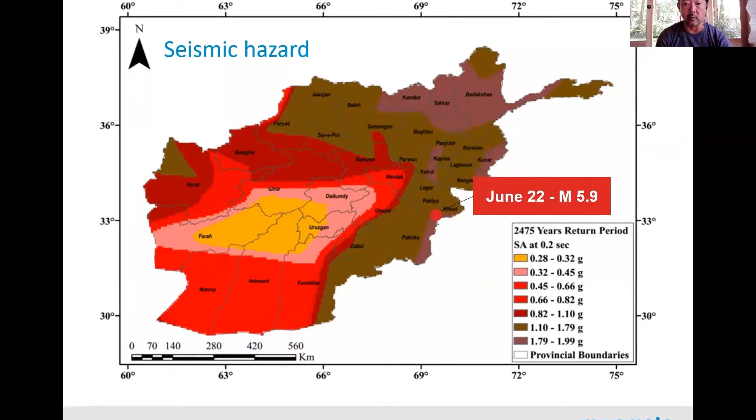So that causes essentially general panic. And many people think that there will be volcanic eruptions in the area. Obviously, that's not the case, but there's some general panic, which we see everywhere in the whole world, by the way. If you haven't seen an earthquake, that's what you see. So that's what's going on.

So earthquake damage caused about 100,000 people to be homeless. And I know this is maybe a little bit outdated information. So Mark or David, if new information comes out, you can always chime in. Okay. And it affected about three different districts out there. And on the right side of the map is Pakistan, essentially.

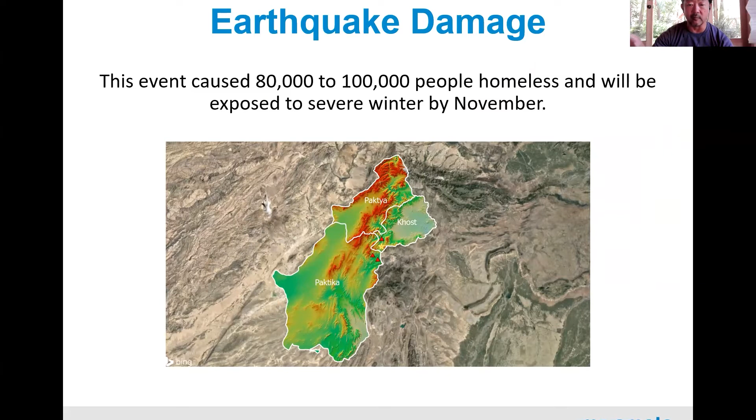So structural assessment: our ground team, led by Zadran, assessed 457 compounds, as we call them, which I'll show you a little bit later. It's a unit. It's a pretty sizable area, usually about 10 to 20,000 square feet of walled area, which has multiple families and many rooms inside of it. That's how the social structure is built.

So 457 compounds, probably we're looking at, what do you say, David, about five to 10 rooms per compound? I think we've now gone up, the latest, because the survey's been ongoing. Yeah, so I think it's actually even higher now. Mark's got the latest numbers on that. Yeah, it was like 5.7 families in there. Comes to a little over 30 people per compound now is what we're seeing. It kind of crept up as we've gotten into other geographic areas. And rooms-wise, three to six, it just depends drastically.

And we basically looked at quite a spread area, right? I haven't seen the latest map of the whole assessment, but basically spread out over the Spira, Barmal, and Gayan districts throughout the whole affected area. The reason we did this: there is a joint assessment done by the UN agency, a house assessment of the whole affected area. But the technical component is pretty lacking because they didn't have engineers to actually assess damage. They questioned the owner of each compound. So we're using this technique to supplement the technical data.

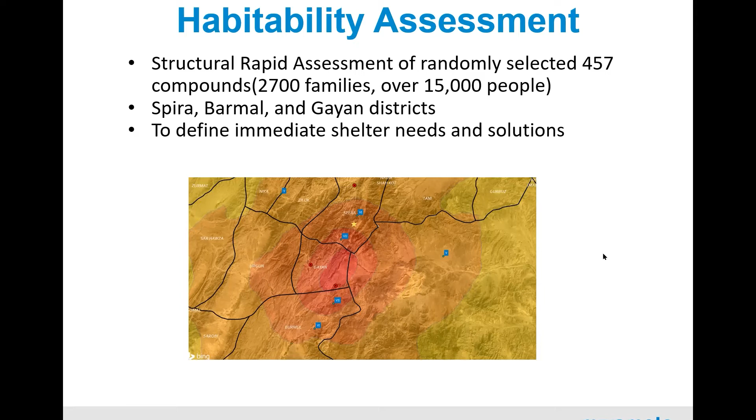I think someone needs to be muted. How's that? Okay.

All right. So the team developed this assessment tool. This is based on ArcGIS and uses Survey123. Mark, you want to talk about it a little bit? Yeah. I think most people are pretty familiar with the ArcGIS platform. Over the years there's been a lot of platforms to collect data in the field. Most recently in Haiti, we used Kobo Toolbox, which is very popular in the humanitarian realm. Being a good private sector company, we look to improve on that. Survey123 is just a lot more stable, a lot more reliable. We didn't have any issues with data loss.

So essentially it's phone-based or tablet-based, mobile device-based. Go out and collect really good GPS coordinates, and then you fill out a survey format. We collected building data, people data, occupancy data, building typology, simple stuff like that, and then estimated habitable areas, damaged areas that can be repaired rapidly, damaged areas that would take a little longer to repair, and then totally collapsed and failed areas.

And then all that data gets aggregated into the database, and Savajit, our GIS expert guru in India, has been an incredible help on this. He developed all these surveys in real time. We were in the field going, oh shoot, we gotta add this, and he'd just edit it up real quick. Really a phenomenal resource and ability. It adds an incredible capacity compared to what we had just a couple years back. Exactly. So go ahead, Mark.

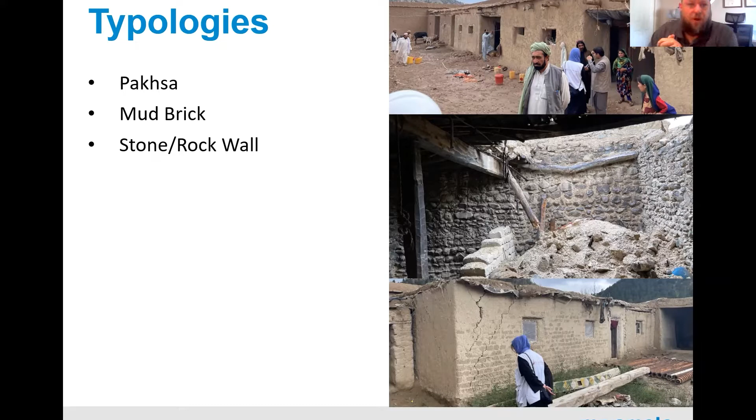Then there's, of course, some stone and rock construction. You see that in the middle over there. That was the least common, at least in the areas where we visited. And then there's mud brick, which was fairly common as well. They build the perimeter walls of the compound in that Pakhsa system, and then as they added rooms inside, those might be done in mud brick and various other things. So that's the building typologies.

So this is one of the compound buildings you see from outside. As you can see, a pretty gigantic structural archetype. It's made of mud. Can you imagine? Those are great walls. Usually about 5 meters, which means about 15 feet high, plus or minus, and the thickness is 50 centimeters. That's the typical thing. A 10-to-1 ratio, 50 centimeters is about 2 feet, a little shy of it.

But it's all made of mud. One thing we noticed: if it's done right, this is actually a great structural system, and it's kept dry.

You can see the kind of a little roof sticking up there to provide it that faster drainage. And also they have a coating over the mud wall to drain things fast, which I'll show you a bit later. But the whole system essentially acts as a rocking wall. So it rocks back and forth and back and forth.

So our Italian team analyzed the structure, looking at about 0.15 G acceleration, which means it's probably fairly small intensity. We start seeing essentially the activation of the rocking motion. So until then it's acting almost like a fixed base. Then once it reached 0.33 G, it started causing collapse in certain mechanisms. And up to 0.5 G, you're going to see the 50% probability of collapse.

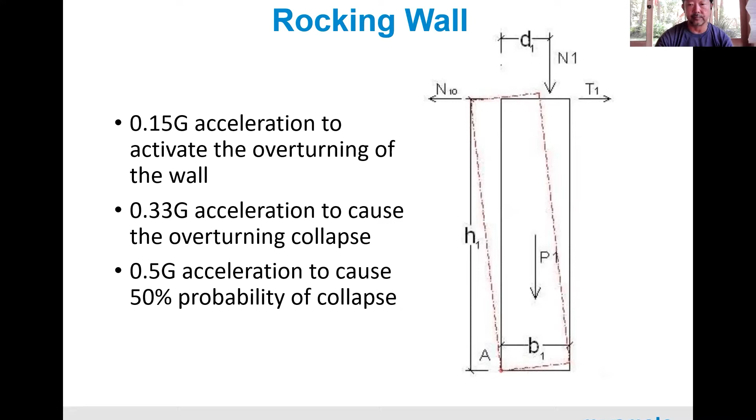So this is the bottom of a wall. You can see little cracks. That's the initiation of the overturning, the rocking starting to happen in there. And this is what we call rooms inside of a compound. So what people do is build a compound wall, and actually after the fact, as it keeps evolving, they build the rooms for the family members along the way. And that's what's going on here.

And you can see the roof structure. Let me see here. The roof structure is mud. It's a mud clay. So what they do is every year they keep adding to it. So this particular building you see here is only about 12 inches thick or so for the roof. But in some cases we saw 3 times, 4 times thicker than that. So it becomes extremely heavy, a really dangerous condition.

And you can see the wood sticking out, that's a joist. And those rooms inside are very small. Usually, I think, Mark, about 20 by 20 feet, maybe somewhere in that range? Yeah, width-wise, basically the backside of these rooms is that perimeter wall that you saw from the outside. I'd say they range 12 to 15 feet wide and a little longer, 15 to 20 feet long. It really just depends.

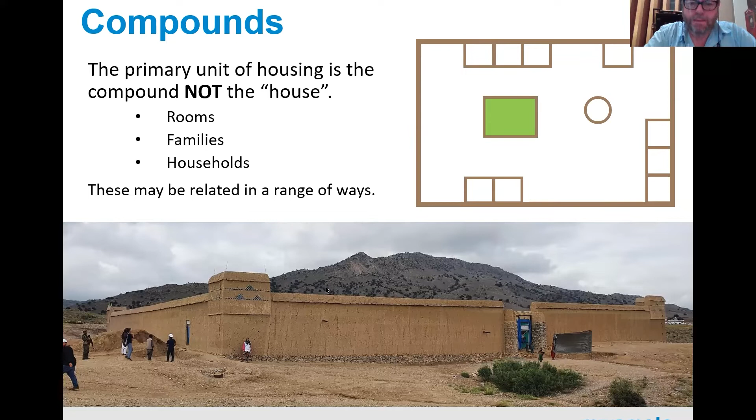So it's compounds, kind of like that. That heroic figure on the right is Jago, one of IOM's UN agency colleagues. We actually work with IOM very closely, essentially embedded into IOM, which is a UN agency - we basically work as part of a UN agency.

I think it's worth commenting on this one. Where Jago's standing, that temporary fence a family put up - that's the compound wall. We came across a compound where just the back wall had fallen over, so this is a privileged look into a compound. It's quite a large, recently built compound.

So it's sort of clean and neat, not full of as many rooms as it might end up with. You can see the family starting to rescue their building materials in the middle, people living in tents, and a cleared space there - the classic kitchen garden area.

In the back there you can see what we commonly saw: roofs that have caved in, but walls still standing. That area in the back is sort of quite repairable.

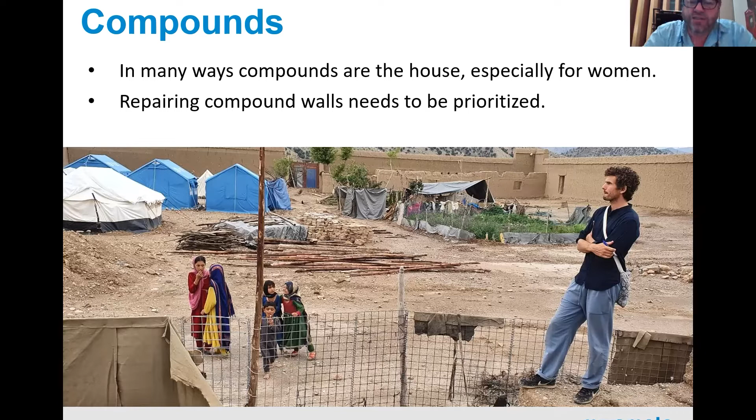So here's a typical construction of a room. That wall you're looking at is the compound wall itself, and about 10 feet out there's also a thick wall carrying the little room structure. You can see the wood joist space dimensions there, and how the wood joist rests into the wall itself. It's actually very important, and we saw this quite often.

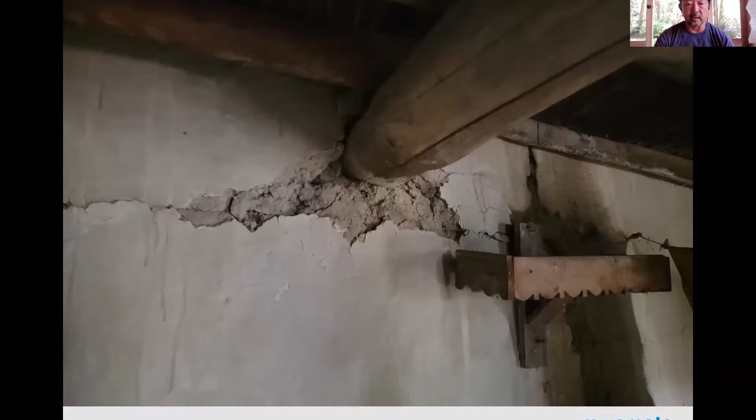So here's a compound wall. What happens is the compound wall rocks back and forth, it moves, but the smaller walls stay there or move at different frequencies. So while it's moving back and forth, the roof joist - the wood joist - stays there as long as there's good bearing, and it keeps moving back and forth. The shorter piece at the front of the room, in many cases, the wood has penetrated through. So the whole thing's moving back and forth.

You can see quite a bit of this type of so-called damage, the evidence of independent movement of the wall itself relative to the room structure. Now, I like this type of failure - it's actually acting almost like a friction device in a sense, so it definitely has some energy dissipation behavior going through this kind of failure and phenomenon.

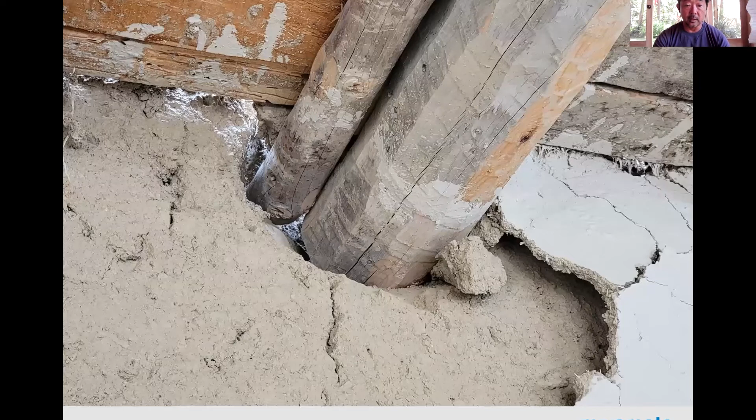So here's an interesting picture. You can see this big piece of wood rested about 1 to 2 centimeters, about an inch or so. So if this earthquake were a little bigger, this whole thing probably would have collapsed. One of the things we noticed is that the ones that survived have a really long bearing into the wall itself.

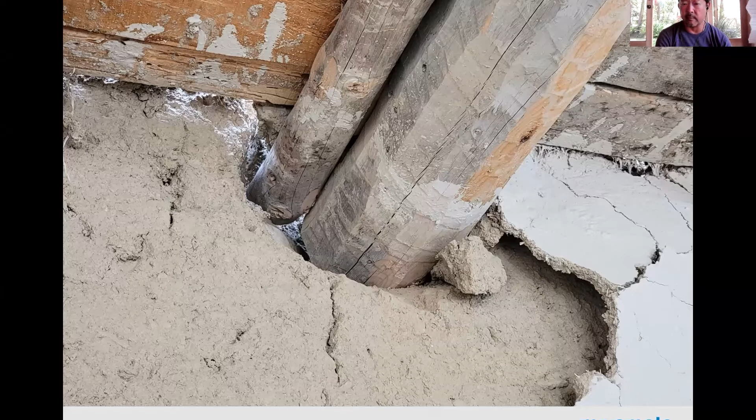If it's penetrated through, those are good practice because it can keep moving back and forth. But if it's sitting so shallow, any movement will cause a collapse. Especially when people annually add clay mud as insulation to the roof, it gets so thick and heavy with a huge beam like this, that's how most people die. We lost about 1,000 people or so, maybe more, caused by the bearing failing. That's how that actual injury and death happened.

This is the compound wall. You can see they put the so-called clay finish over it. The clay finish is made of local clay from right on spot usually, and you can see a little aggregates mixed into the clay already, very stiff clay by the way.

But they actually mix in this hay. What happens is when the rain comes, the hay makes the drainage much faster because clay plus water is going to melt the clay, so it's very important to have the water repelled from the surfaces. But if it's done right, you can see this beautiful finish like that.

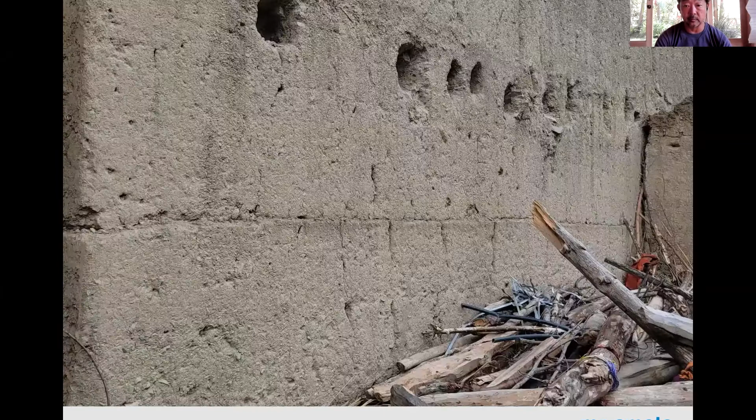Here's the evidence of failure I was talking about. You can see the wood falling at this corner right here, this wood used to be in there, so it doesn't have enough bearing length. It's going to fall off and kill people. Pretty simple process. But you can see the actual wall itself has very little damage there. That's what failure modes look like.

Heavy roof, no bearing, any movement kills people. And this is the actual clay brick. Mark, you want to talk about it a little bit?

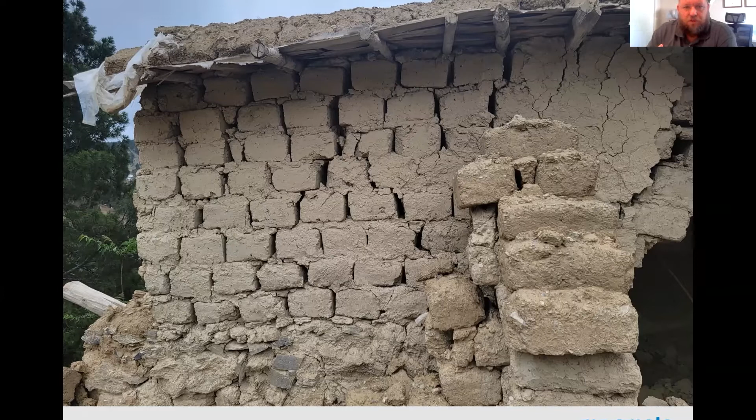Yeah, so again, clay brick, the roof systems are the same. It's made from the same stuff, the clay on site, they take it and make it into their standard blocks. So a few things we identified between successful construction with clay brick and unsuccessful construction: water protection aspect was number one. Water shows up, runs down, and washes all the mortar out from between the bricks, and that was really, really detrimental. You can see an example here.

Then the bricks are free to slide around. So there's an example where it's done well. There were different mixtures too, kind of mixing in smaller angular aggregates with it. There were cases with no aggregates and they performed really poorly. Here you can see there's some good stuff there.

David also talked about, feel free to jump in here Dave, how that helps with the water. As it runs down, it helps create irregular lines of water running down so you don't get so much erosion of it. I mean, after all, it is all just mud.

And all this stuff is made on site. There's no manufactured block like in Haiti, where it was all about getting quality block manufactured. So the challenge here is pretty different in that we need to be able to teach the actual constructors who are going to be on site to do this stuff. That's a difference between this reconstruction versus Haiti about sourcing quality block.

Yeah, we'll address that a little bit later, but it's so true. First people were talking about repairing the roads, right? I thought it was a fairly decent idea. Once you get there, you're going to see there's no roads to repair. Roads are essentially like a dry creek bed through the mountains, that's the roads.

So there's nothing to repair there. Once winter comes, which happens after November, places essentially get shut down. There's no access at all unless you helicopter in. So it's a very harsh condition. Bringing in the steel or rebar or cement, well it can be done I guess, but it becomes really expensive and takes a long time.

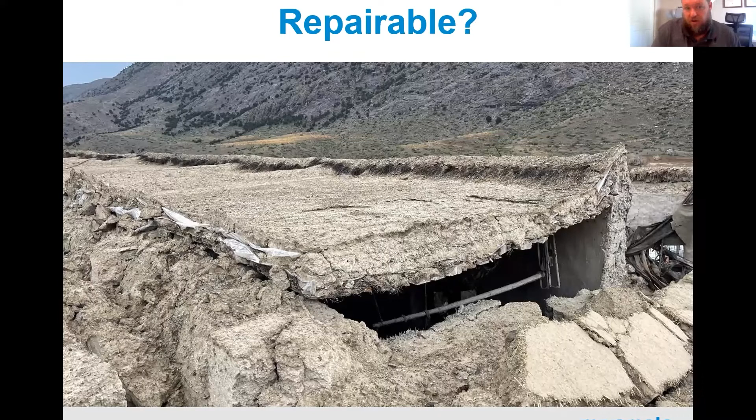Here we can see a good example of those really thick roofs. I mean, this is probably 45 centimeters, 18, 20 inches thick at least. Really, really heavy roof, but front of the building's it's fine. This is the back corner, actually, that same one we were just looking at. And then end wall again. Here's repairable or unrepairable.

Hey Dave, what do you think? Oh, repairable. And I think the real question here was what the people need to understand is that when we came in, the question here was what's the best emergency shelter solution for people to ensure for winter.

So everybody's been given a tent. It's going to get down to -10, -15 up in these areas. And one of the questions that we were sort of posed was whether repairability was an adequate emergency shelter solution. And we sort of got to remember that unlike most disasters in the world, this country doesn't have a government.

It's got the Taliban terrorists in control, so you have a de facto administration. And that means that the World Bank, IMF, ADB, nobody's really going to chip in and fund a major reconstruction program. So it's not like anybody's going to come charging in and build lots and lots of houses. So it's more we were trying to look at what spaces could be repaired rapidly and be used as adequate shelter for winter.

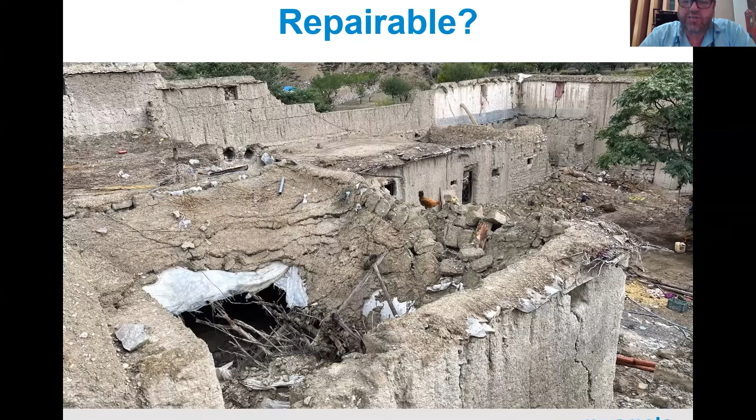Adequate emergency or transitional shelter for winter. And so this is a good example where I would say a lot of those rooms were repairable for that purpose.

Repairable, of course, isn't cut and build back. And this is one of the rare cases that we saw the actual failure of a wall like this one. And we actually interviewed the owner, you know, what do you think has happened to it? He goes, of course, it's gonna fail. Because he said that particular area, he built a wall a little tilted or something like that. So yes, if it's don't do right, it definitely fails.

One more thing, major difference between the failures and not failed ones, it's a lot to do with the quality of it. Quality of how actually the clay is mixed and the size of aggregate and how it's built. It's actually really critical. And also, as Mark is talking about, the water drainage and the finish over that. So that type of things are critical elements of it. But if it's done right, it actually works great.

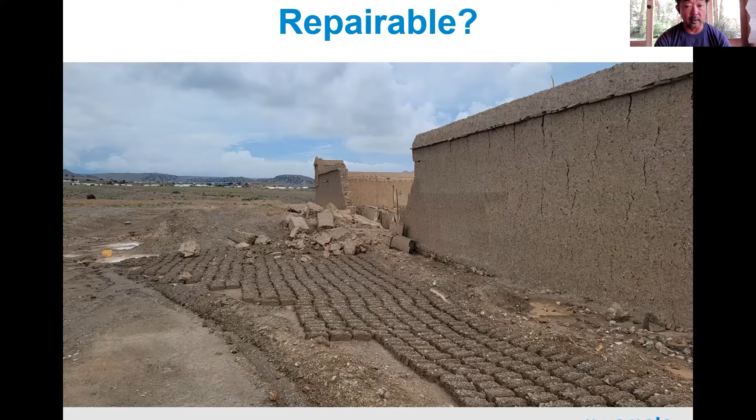Now, so question we're thinking about it, why did these buildings evolve here? You just think this way. I mean, people live in it for thousands of years, right? And there's nothing to build on but just clay. And also earthquakes do happen fairly frequently. Every 100 years, every 150 years, every 50 years.

And you can see this kind of archetype essentially evolves. You know, if a thing doesn't work, they don't build it again. So that's why I think there's best practices that exist in this kind of community, where highly seismic resistant elements like that, or ideas or methodologies, kind of exist.

Also, we do notice that many people do not follow the so-called wisdom of how to do it right. We're talking to one compound owner whose compound is completely fine. It has very limited damage, if any. And he was saying when he built the compound, many neighbors laughed at him. They're laughing, saying why make your wall so thick? Why are you putting finish over this thing? Why this, why this, you're silly. But guess what, his compound survived.

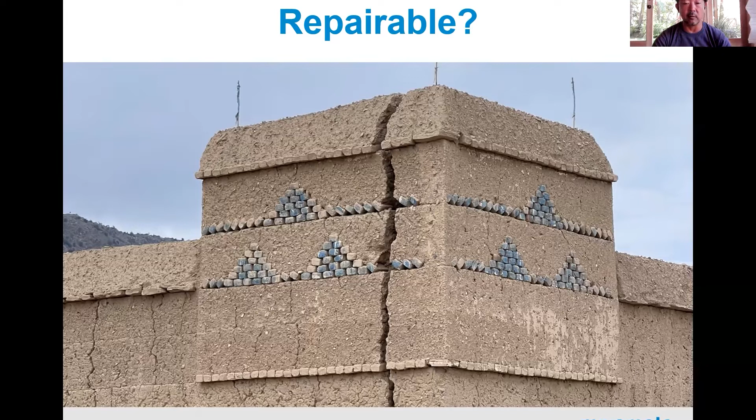So there's definitely knowledge and wisdom that exists in the community. And what our next chapter is really about is extracting that and having a certain scientific background of this thing, to use as so-called documentation for repair and reconstruction. That's what we're looking at.

So this is one of the clay things. Is it repairable or not? Probably not, because what happened here is that once that clay gets exposed like that with the rain, it melts. You can really squish it with your foot. But those clay can be reused, by the way, if it's good clay with good aggregate in it.

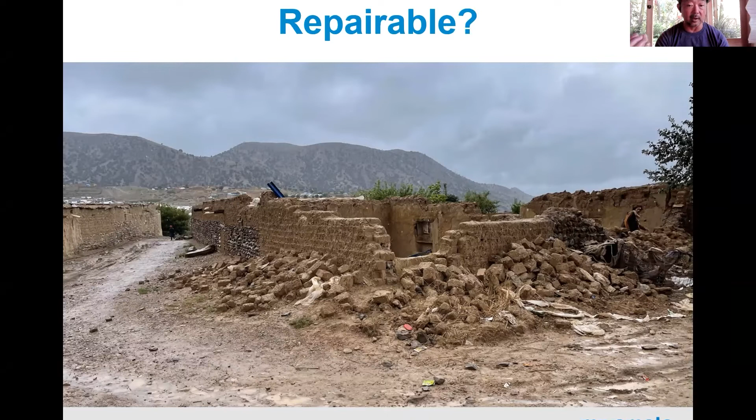So here's the results. It's pretty fascinating. So-called collapse is what we'd call red-tagged in the ATC-20 kind of a look of it, about 17%. Repairable, yellow and a combination of small red, is about 50%. And habitable, which means green, no damage or nothing at all, is about 30%.

Some of the repairable was probably considered to be red. So if you take that, the actual red is probably up to like 30%. Yellow is 30%, habitable green is 30%. So a 30 mix. This is like a magic number. We see this everywhere. It's pretty fascinating, isn't it, Mark? I mean, the combination we saw at the 2021 Haiti event was something like this. Slightly different here and there, but you can see this pattern quite a bit.

So we figured that repairing a room takes less than 1 month, in many cases less than a few weeks, actually a couple of weeks. And even reconstruction takes less than a couple of months. So if it's done right, with immediate action, at least 50,000 people who lost their homes or shelters can be sheltered through repair and reconstruction by the winter.

But it just depends on how fast the funding comes and how fast the UN agencies can move. Because as you can see, there are no traditional NGOs or companies out there, because Afghanistan right now is, as you know, in a very peculiar position. So it's only UN agencies really taking the main chunk of this work. Do you want to add something to the results, Mark or David? No, I think that's fairly accurate.

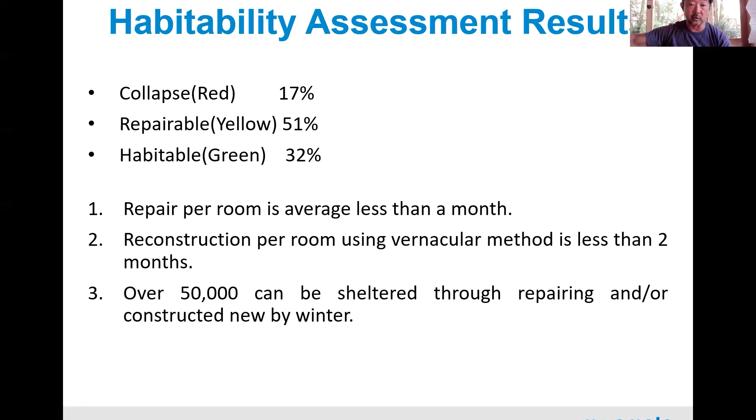So it's definitely engineering work here to reconstruct and repair, but we also need to understand the social format and the evolution of the architecture. We really need to understand that to do the right solutions, which can be implemented fast and also improve the safety of the residences and population down the road. That's actually really critical.

So as David and Mark said, most compounds do have enough rooms to be repaired as shelter. That's key. For example, back there, that wall, I know that's a really good wall. And it has a lot of party walls. It's like a honeycomb, a pretty stable structure. You just have to have the right wood joist roof structure, the right bearing, and should not build any more thick clay roofing like that.

Dave, you can talk about this outreach. This is actually a critical one, because people never experienced this kind of earthquake or disaster. And they're really scared, especially of the geotechnical hazard. That's something they're really concerned about. And they're also scared and just want to move out from that area, which is considered extremely difficult and expensive.

Yeah, and I think it's really interesting there because in most disasters, most of the recovery will actually be self-recovery. In any disaster, humanitarian input is quite small. If we look at it globally, we normally manage to help do about 5% of the work. That's sort of where the humanitarian sector's at. So there's a couple of things there.

One is about empowering that self-recovery process and making sure that whoever's building whatever has the knowledge about what they should be doing and understands what they should be doing. But also empowering in terms of encouraging it to start happening, because often people will sit around waiting, expecting and looking for assistance.

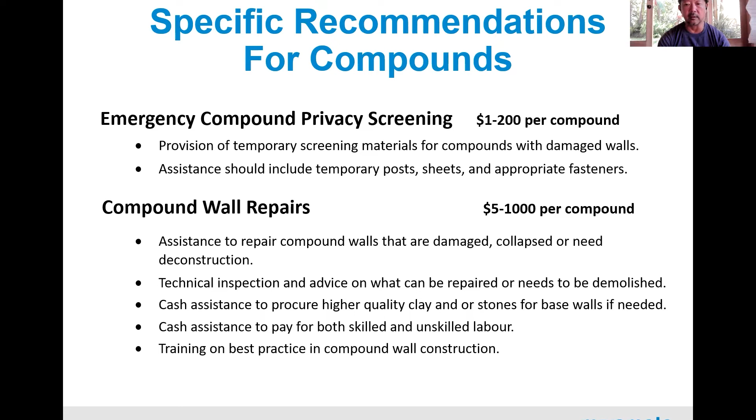So we recommend privacy screening, essentially to just make sure of privacy in a compound. Obviously, it's not very expensive, somewhere between $100-200. And wall repairs, as we talked about, keep the social structure. It's critical. Somewhere between maybe $500 to $1,000 to repair the compound walls. It's not very expensive. Repairing the houses, the vernacular rooms inside a compound, $500 to $1,000 maximum. I think in the real sense, probably less than that.

I just got a feeling of it. The materials are essentially free, right? You get them from the ground, really. You may go 1 kilometer away potentially. It's not that far. And I think it's just the labor component, so that's where the numbers come from. But it's very, very affordable to do this much quicker. And even new reconstruction is estimated at around $3,000 per house. That's what we're looking at.

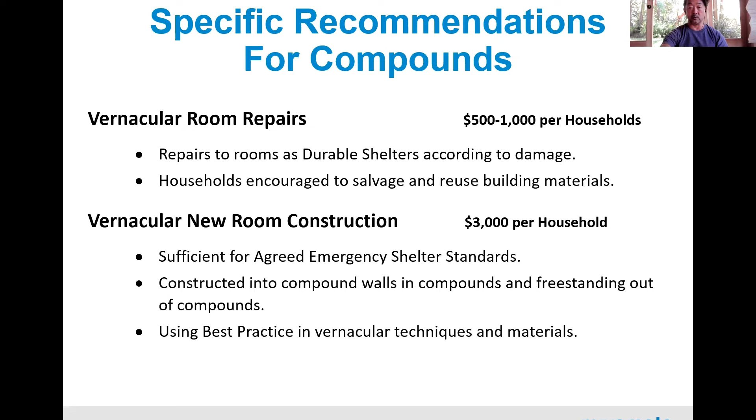And the seismic upgrade is: do not disturb what is good, right? I think that's a really important one, especially as they have a very flexible kind of structural system, as you can see. It relies on rocking. A rocking system is great. It does absorb vibration energy. As you know, many of the mid-rise buildings in the Bay Area or high-rise buildings in Japan use the rocking system to absorb energy. So we know that it's a very stable system if it's done right.

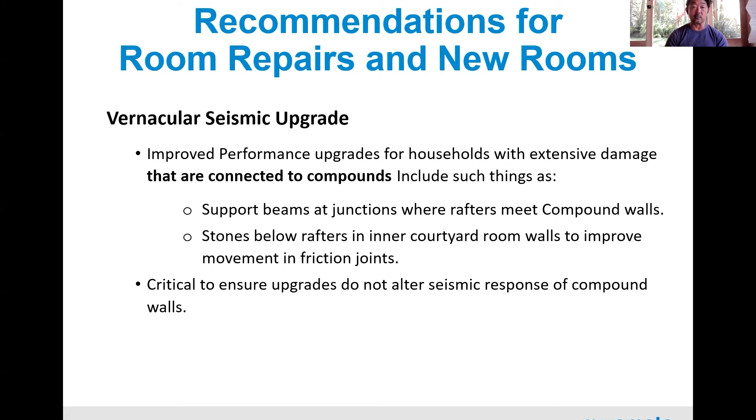But some of the things that can be done would be adding more good bearing connections. I think it's a very important one, probably one of the most important things: make sure that the roof structure doesn't fall off when things move around too much. That's where the deaths come from. So that's the critical part right there. So the next step for us

is the geohazard. We have two main things; we are about to sign a contract, probably next week. The geohazard investigation is more like communication about what the risk is to live here, how you can live, and that there will be no volcano eruptions. That's something we can guarantee. So that type of thing. That'll be done by our teams in California, India, New Zealand and Nepal, and also obviously the Afghanistan experts.

It's very important to involve the experts at the local level, because this brain power does exist, and using as much as possible locally is really critical. And we're going to develop the tools and the training for the so-called repair and reconstruction elements, and provide technical support in the field hubs. We're looking at 3 different hubs in the affected area, technical centers where our Afghanistan engineers will be working with counterparts of UN agencies to provide the training, quality control, and such. So those are the 2 main programs to be done over the next 3 months or so. You want to add something, David, Mark?